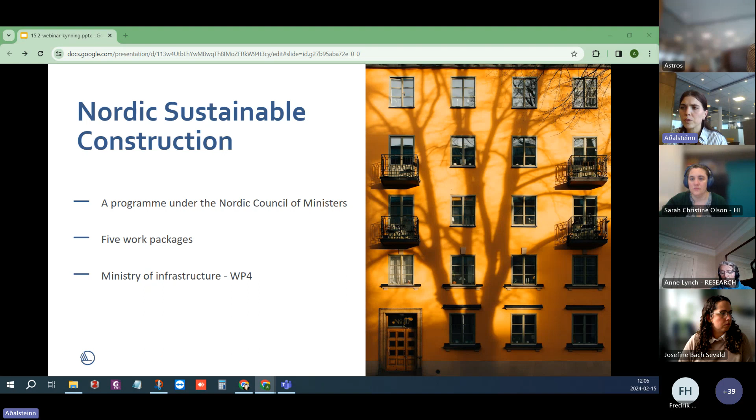The aim of Work Package 4 is to reduce carbon and other direct emissions at construction sites by supporting the transition towards emission-free construction sites.

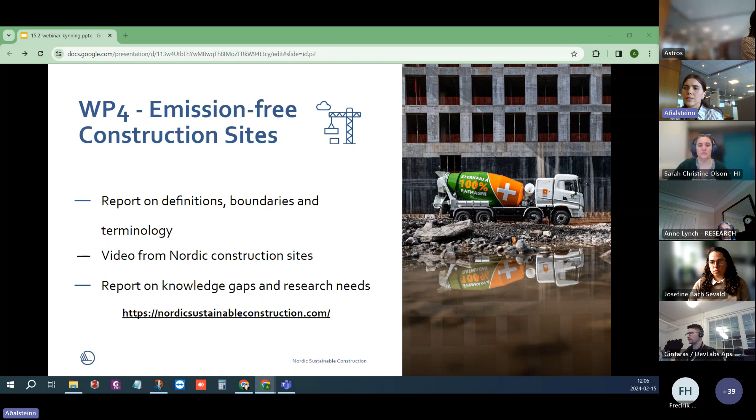On the NSC webpage, you can find previously published reports, videos from site visits, and other materials. We have also distributed several newsletters providing updates on our progress. The newsletters also include relevant reports and news concerning emission-free and zero-emission construction sites. You can sign up for this newsletter on the NSC website as well.

Right now, we are working on our next delivery, that is guidelines for how to plan, procure, and evaluate emission-free construction sites. We aim to publish those guidelines this summer, and then we have the report on standards, rules, and regulations that can be hindering, being published later this year.

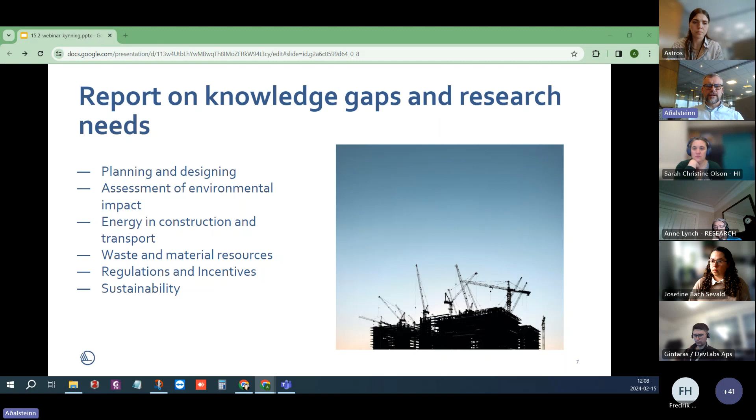Yeah, but why are we doing this? Emission-free construction sites is, yeah, we call it a new field that is looking into the construction site emissions.

And well, as with building and construction, it's always better to know what you're doing. So we need more knowledge on how to overcome barriers, and then how to from that develop best practices, and hopefully very quickly build industry knowledge.

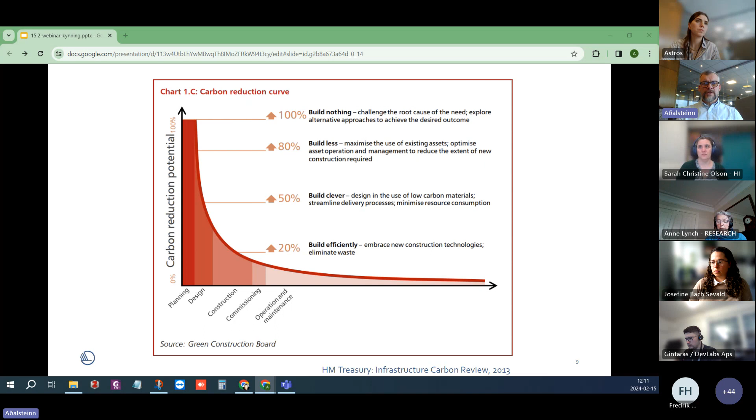And this starts all with planning, even countrywide planning of activities, and then the typical urban planning or city planning. This can have impacts later on the construction site of each construction. And we need to know more about this.

What are the impacts on planning decisions? We can take transport of bulk materials, for example. That is very energy consuming. Can this be somehow already minimized in the planning phases? Is clean energy an option in this location or area? And so on and so on.

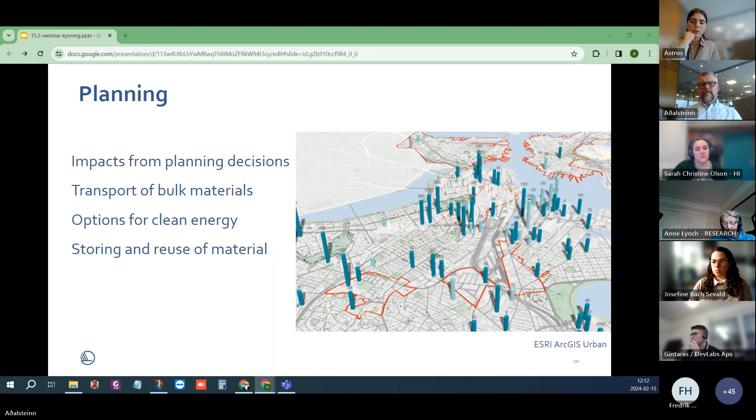And then the design. How does design impact construction site emissions? We need more knowledge there. How is the initial phase of construction, the earthwork, the founding of the building? Transportation, is light building material better than heavy somehow?

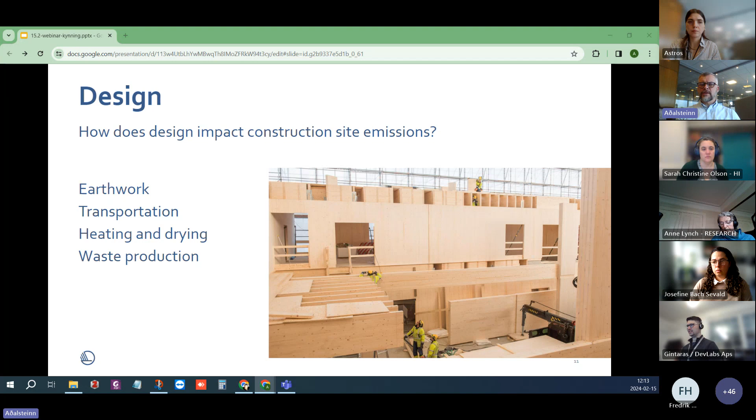In the report, we have these high-level recommendations that could be interpreted into research projects, and we want to know how these pre-construction phases influence emissions in construction. Material transport - how is that influenced? And the building types and materials - how do different choices affect the on-site emissions?

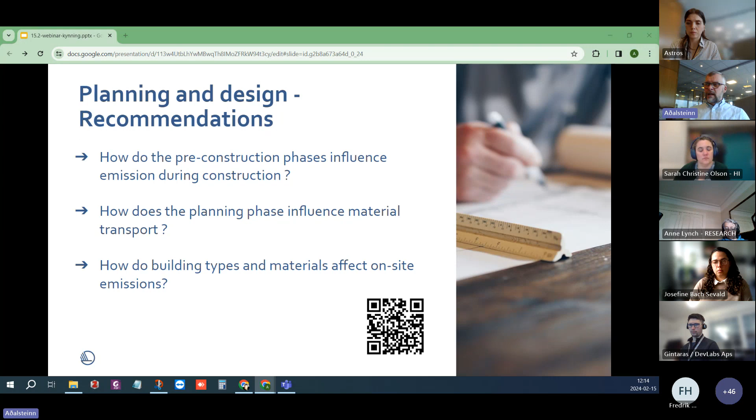Okay, let's go on. Assessment of environmental impacts. There's this cheesy quote from another field: but you can't improve what you can't measure. So we think this is important to do.

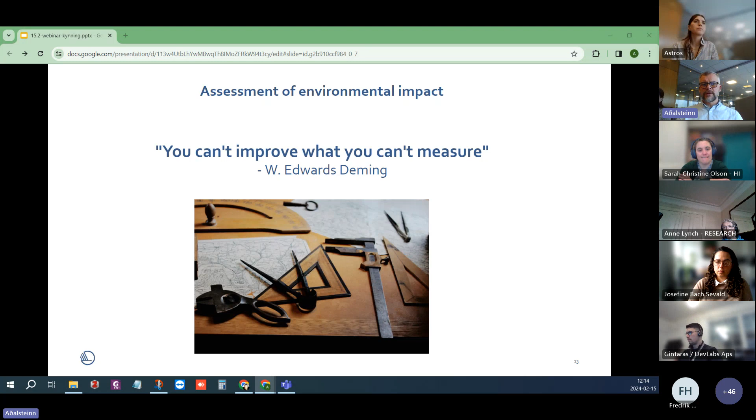Firstly, we have to define what to measure and how. We have this tool, LCA, Life Cycle Assessment, that is well known in the industry, and we recommend that we build upon this.

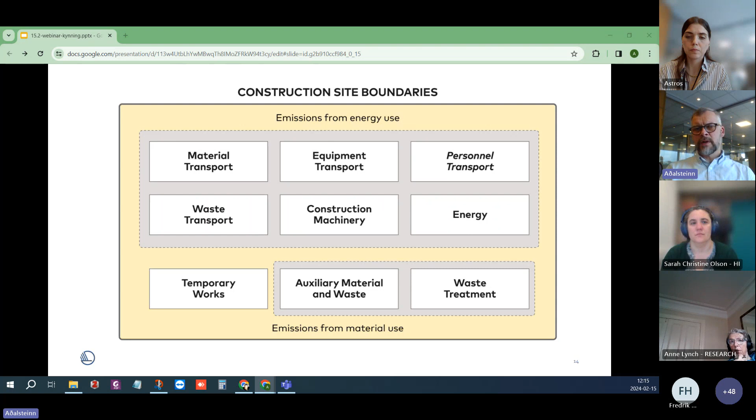But it's complicated, maybe especially for construction sites. There's complicated transport routes, there's many complicated construction processes, and there is limited data.

Things are moving, but we need more data about projects, and today there is great variance between projects, so it's really difficult to know overall in the industry what the emissions are for the construction phases.

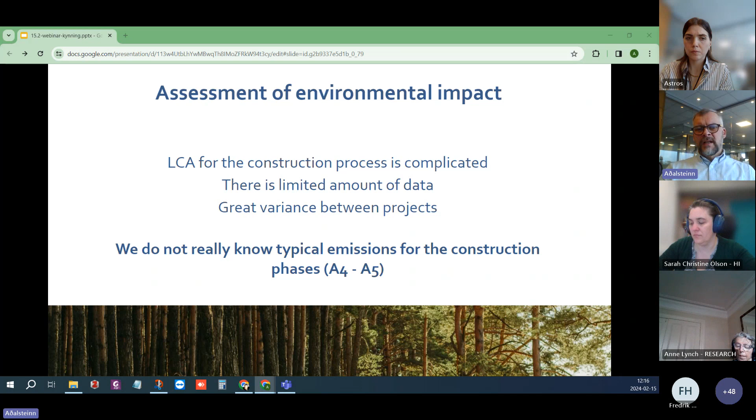So, simple in this context - this is about developing and harmonizing a Nordic framework for measurement and assessment, and improving knowledge on emissions related to modules A4 and A5. These are LCA speak for the construction site.

Okay, let's go into - well, now we are at the construction site, as you can see - and what most people think of when we speak of construction site emissions.

At first, when it comes to energy and use of resources, we should first minimize the energy use, and then the rest of the energy, well, the energy we have to use, that should be clean. But the contractor at the site only has so much control over how much energy is needed to build the house. But there we might find methods to minimize waste of energy, so that the energy efficiency of the construction process is high.

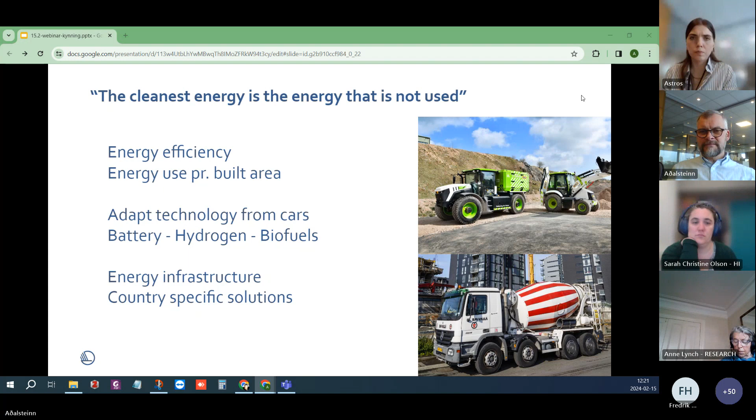We already have some experience with battery electric trucks and machinery, excavators, but hydrogen is coming, I think. We've been saying this for a long time, but like with batteries, the fuel cell...

...that will be the main driver of hydrogen machinery and trucks is very expensive now, like batteries were many years ago. So people are hoping that the price will become lower very soon. But then we need infrastructure for distribution of the hydrogen.

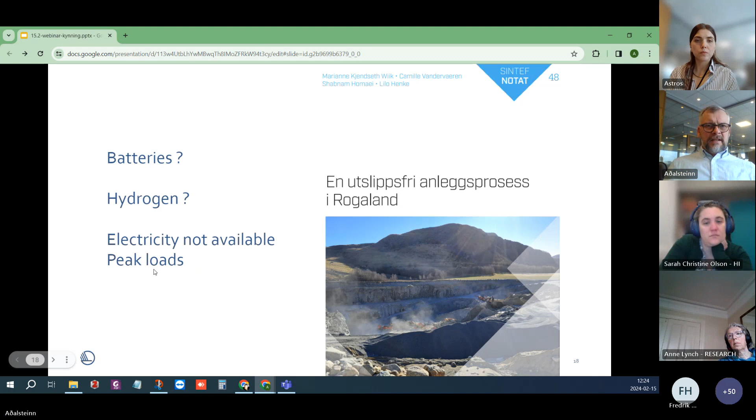So for energy in construction and transport - because we see transport of materials as part of the construction site - first, use less energy if possible. Improve energy efficiency.

And look at more energy options than just batteries - for example, hydrogen, some countries maybe biofuels. And then adapt to the construction site, find methods to manage the energy and energy infrastructure at the site or around the sites.

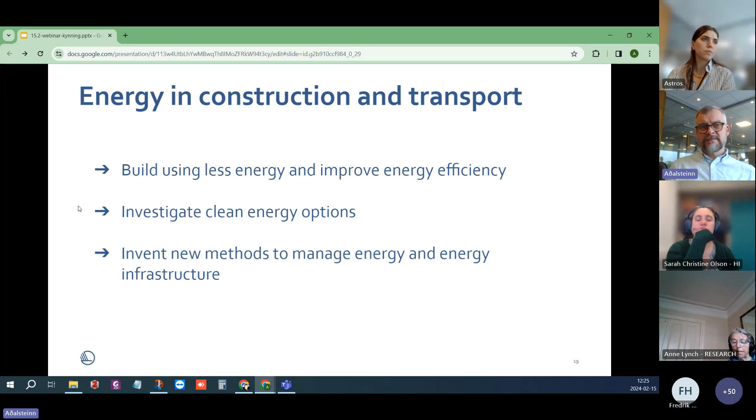Okay. Still at the construction site - this is also interesting, because it turns out from recent research that waste, as we define it at the construction site, produces a lot of emissions.

As this is defined, what we propose is that emissions from production of wasted building materials should be attributed to construction site emissions. This is for correct bookkeeping of emissions in the building life cycle.

It's not only about handling of the waste, it's actually the embedded carbon in these building materials that are not used and become waste. But we say waste is just new material for other purposes.

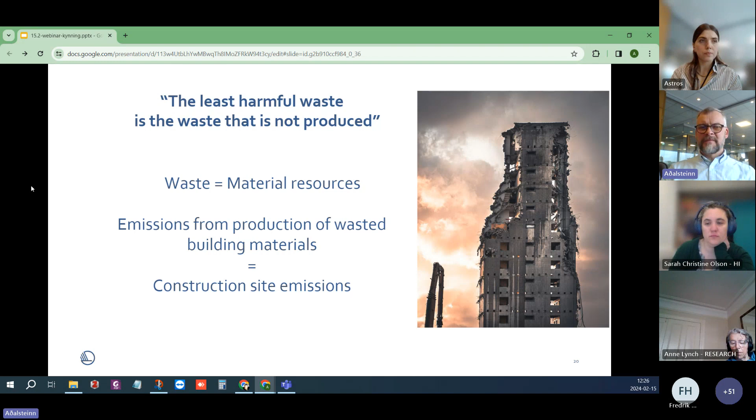That leads directly to something that could be investigated further, and there's a lot to talk about, because we can't prevent waste, but we should use it as a resource and try to at least recycle, but preferably upcycle.

Try to use material that is maybe cut off at the construction site. Use it somehow in new buildings or other buildings, or somehow preserve its value.

So for construction waste, which is also just material resources, overall we should investigate the life cycle of the waste - what is it, how is it managed, what are the emissions, and what in the building causes the waste - and then reuse, if possible, at least recycle materials.

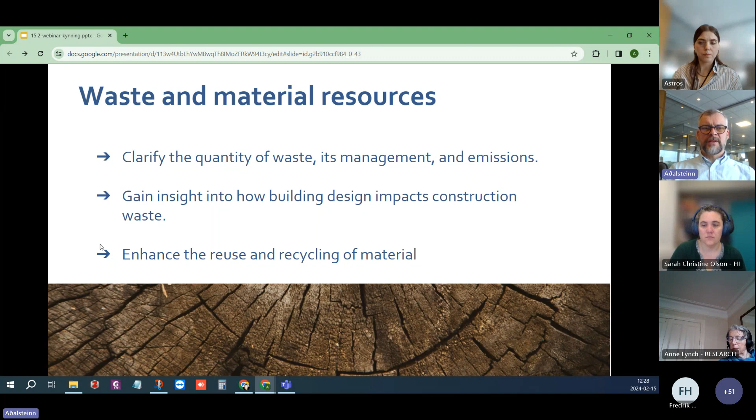Green public procurement has proven to be very effective. Again, Norway has shown some excellent examples, and we could copy those methods. This is actually a combination of sticks and carrots.

There are requirements about emission reductions on the construction site in a building, and the city or city council, or whoever, pays a higher price for the project.

Then we have the limit values that the Nordic countries are developing, where construction projects must be under certain limits for emissions for the building projects. The construction site, the A4 and A5 phases, are in some countries in and some countries out, but eventually it will be included in the limit values, as I understand it.

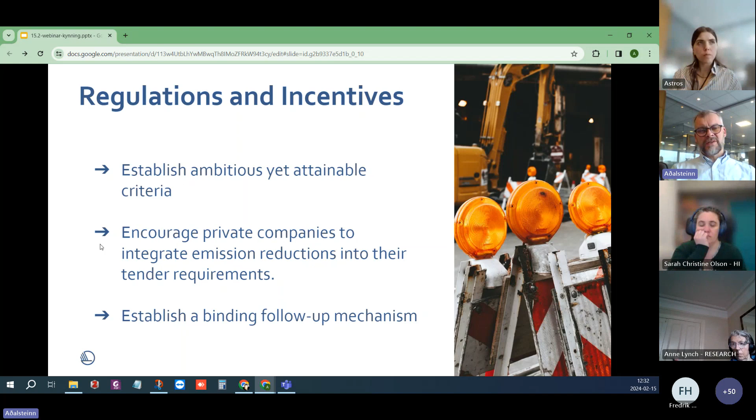Okay, to the last chapter - because this is the project Nordic Sustainable Construction. But the most sustainable building is the building that is not built. How do we do this?

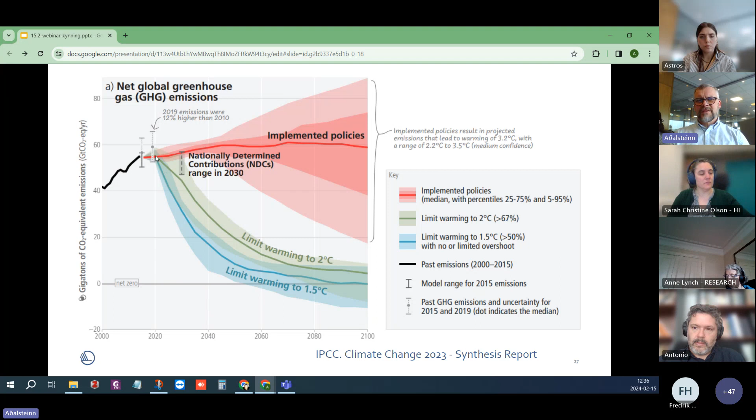So it's kind of scary, and we have to do something now. But at the same time, the economy is growing, and the construction market is expected to grow in the coming years. We are building more and more houses.

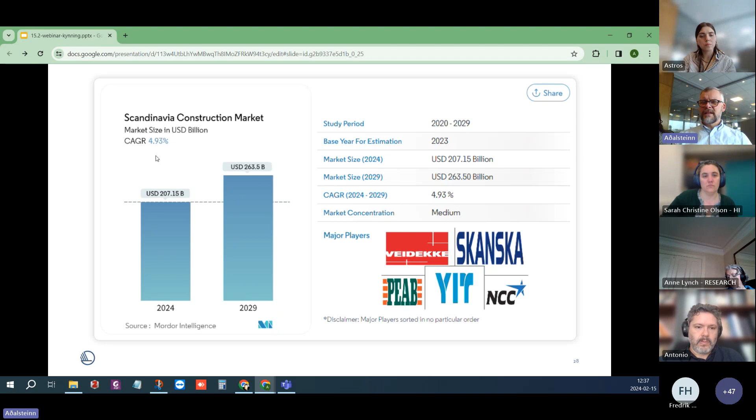So how can we do that at the same time? We have to somehow look at the whole picture. There's something that isn't adding up here. And well, I think most of us, when we think about climate change...